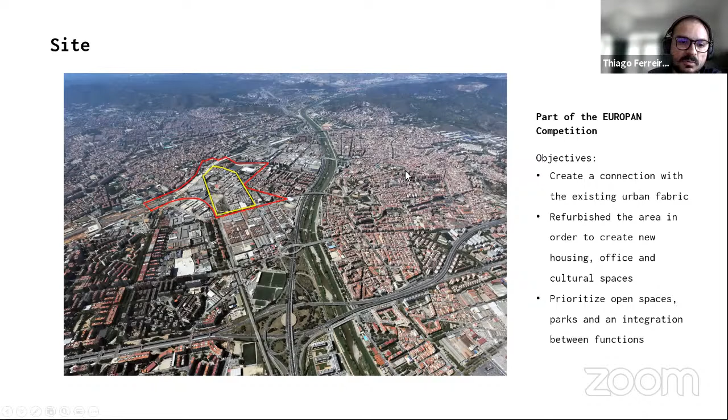The idea is that this area was part of an old competition called EUROPAN, as we are aware. The main objectives were to create a connection with the existing urban fabric. We know Barcelona is very rich when it comes to urban connections with this old urban tissue. Refurbish the area in order to create new housing, office, and cultural spaces, and give priority to open spaces, parks, and create this connection and integration between functions so the area becomes very lively.

So we ran just a few climate analyses, and as you can see here on the left, the wind rose indicates that the prevailing winds come from the north.

If we look at the radiation rose in the middle, we see that heat gains go up to 1,000 kilowatt-hours per square meter, and the majority comes from the south. Looking at the psychometric chart, we notice we have a lot of hours, usually over 100 hours, that we're out of the comfort zone. So we need to take interventions and measures to tackle that in our urban studies.

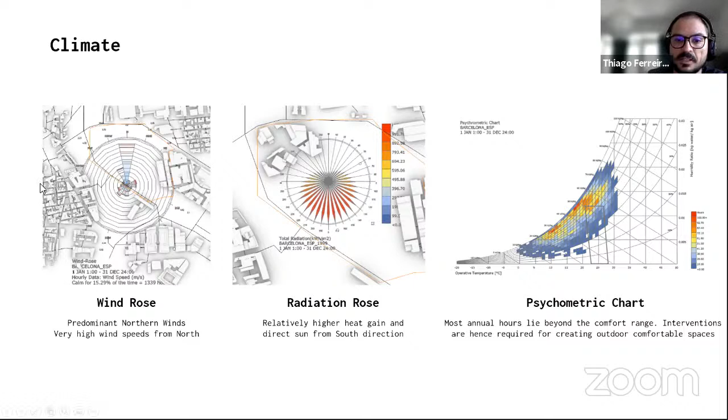Starting with the vision, the idea was to develop something very populated and safe, bring on the diversity of activities to make it a very attractive area, and also be able to activate daily life, and of course develop all this vision through a sustainable development approach.

In order to achieve that, we developed a couple of strategies: using mixed-use typologies, making the area very walkable, and to do so, we need to make sure it's also comfortable with a lot of greenery and shaded areas. We know Barcelona is pretty hot in the summer, and of course we're trying to tackle the problem of high energy consumption.

The KPIs we chose were solar radiation on ground, solar radiation on facades, wind speed and wind comfort. And when it comes to quality spaces, we chose compactness, occlusivity, and also PV potential.

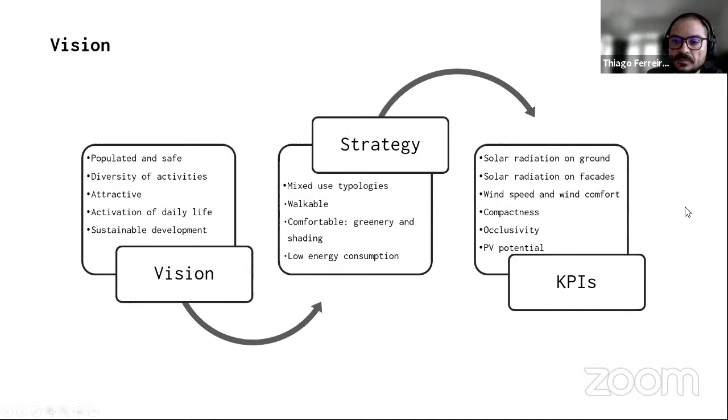So the whole idea for the area is that we could develop all these mixed-use typologies, mainly trying to connect the existing urban tissue. We know it's an industrial area, but some of the buildings around might have cultural value, so why not keep them and keep this spirit of the place.

What we see on the right is the idea inspired by the superblocks from the old urban fabric in Barcelona. There are buildings that take the perimeter but leave a courtyard in the middle to create this microclimate, but in a more optimized version, with plans that are less deep — 12 meters instead of 27, which is what we have in the old urban fabric of Barcelona. This gives more access to daylight and also creates a better microclimate.

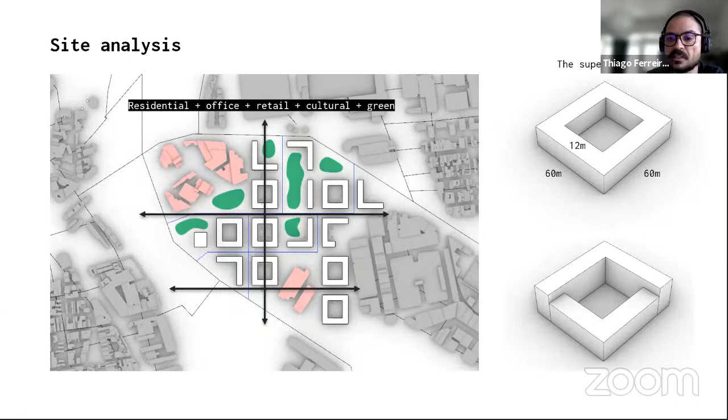And of course, we can see on the lower right that we can vary this typology as much as we want to create the uses that we want — they can be offices, housing, and cultural spaces as well.

We came up with 5 different proposals, and as Theodore said, the main aim was not actually to pick the best proposal, but rather compare these proposals and see how we can interact with the tools, what answers they can give us, so we can compare them and see the pros and cons of each one.

Basically, we varied these quarters or blocks around these 5 different proposals. Some of them have towers as the highlight spot of the area, and try to maximize the green spaces and green areas as much as possible.

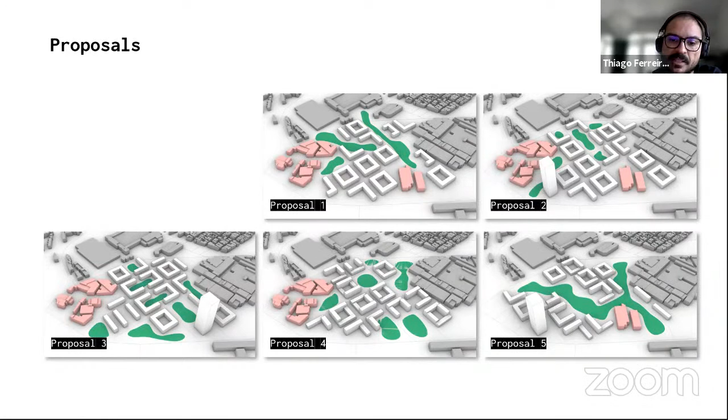As for the visibility analysis, we chose 2 metrics: compactness and occlusivity. It's interesting to see that the first 2 proposals here on top have a lower number, meaning they're more complex — which I think relates to the feeling of surprise we have when we visit old European cities. That might be something interesting to recreate.

This metric tells us how diverse or complex this environment or new place is that we're creating. When it comes to occlusivity, we see that the last two proposals, proposal 4 and proposal 5, have more open spaces — therefore the occlusivity is pretty low. So the whole space, the visibility, is a little bit enlarged from the main interest points we came up with in these urban planning proposals.

I'll hand over to Saket. He's going to talk about the environmental analysis.

Thanks, Thiago. I'll continue from here on the different analyses we did. As Thiago mentioned, we were not trying to come up with the best solution, but more to test out different tools from different plugins and integrate them with InFraReD, see what's possible, and play around with different things to improve the workflows we typically have.

So let's say we are using InFraReD to do the solar insolation analysis, and a few common things we can observe is that some massings create more insolation in the courtyard areas or in between the massings. These could be good spaces to put up parks, or the inference could be that if these spaces have to be utilized for outdoor sitting or conducting long-hour activities, then they need to be well shaded. The speed of the simulation allows us to test out multiple options.

That was one great thing. Since we had only 2 days, we just narrowed down to 5 options, but tried various types of analysis. Something more interesting, maybe we could look at the performance of the options in terms of KPIs - let's say how much percentage area is below a certain threshold, and we could filter out the performance of those options based on those numbers as well.

If we had more time, we would have wanted to split up the analysis between summer and winter, or maybe the 4 seasons, because in summer we want to reduce the insolation, and in winter we want to maximize it. That would be perhaps the next level of breaking up this analysis.

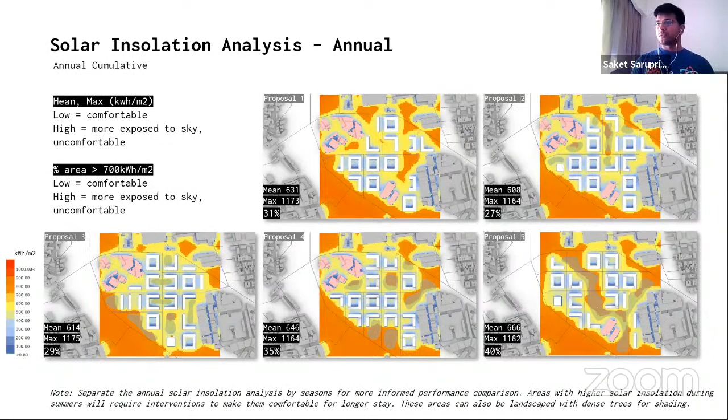If courtyard spaces are more crucial for us for the development, and they necessarily have to have high wind comfort and low risk of uncomfortable winds, then we could perhaps focus on just those areas and develop KPIs for those areas. We could choose, let's say, just the parks if they are important, and make sure the parks have less uncomfortable wind speeds throughout the year.

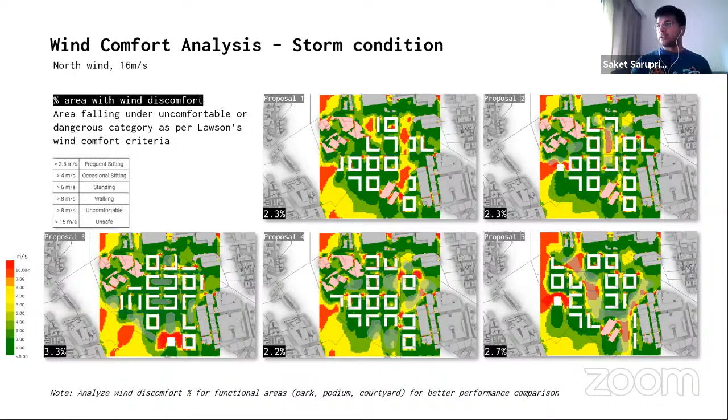Similarly, the solar insolation on facade - we wanted to bring in the energy factor as well in the project or in the analysis. So we coupled it with Ladybug tools. We just did a very coarse grid analysis on the facades, and that is in some way representative of what's the heat gain from the facades inside the massing.

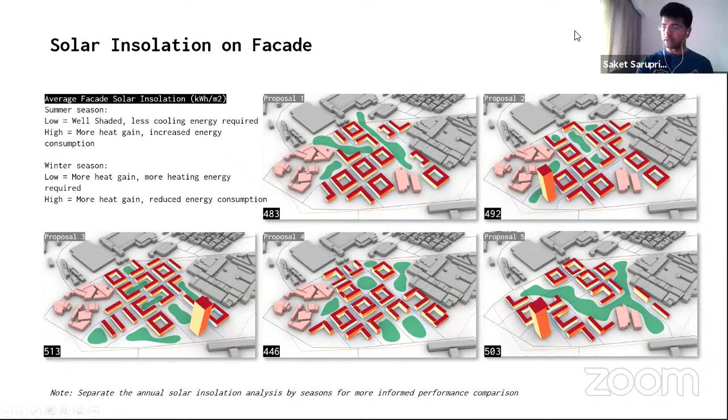So for all the options, we could find out what's the average heat gain per meter square, and that could be one of the KPIs as well. And of course, if we had more time, we would have wanted to split it into different seasons. In summer, we want to minimize radiation, and in winter, we want to maximize the radiation, and that directly relates to your energy consumption as well for heating and cooling.

Similarly, since we are doing radiation, we could also analyze, let's say, the PV potential of this development. So if we use 80% of the roof area for photovoltaics, what would be the overall PV yield annually? The numbers here are in megawatt hours. I think we're not going too much into the numbers, but just trying to explore what's possible if we increase the speed of simulations.

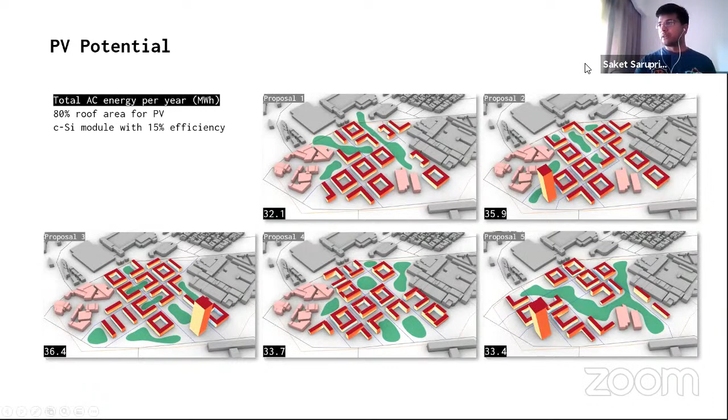So we had 5 design options. We did a few different analyses in 2 days' time, perhaps much less, because each one of us was spending just a few hours out of our daily schedules trying to bring scripts together and then put everything together in just one single package.

The key question we were always thinking in this workshop is: what if our simulation times were reduced by a factor of 10 or 100 or 1,000, in case of CFD simulations? So what if we had more time?

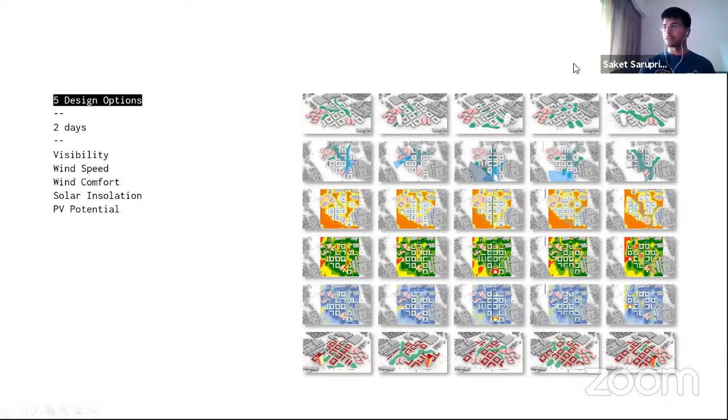I'm a building performance simulation guy, so for me, if I could get CFD results in 10 seconds, I would probably redo the whole approach to outdoor thermal comfort analysis. The CFD part is the most time-consuming part, but because InFraReD allows us to do one wind direction in 10 seconds, we could do 16 wind directions, and suddenly we have a base result for all of them.

Then we could extrapolate based on the hourly wind direction and incoming wind velocities for the whole year, and get the hourly wind values for every single analysis point. Similarly, the mean radiant temperature could come from EnergyPlus or IES simulations, or we could just use the incident solar radiation for a simplified study.

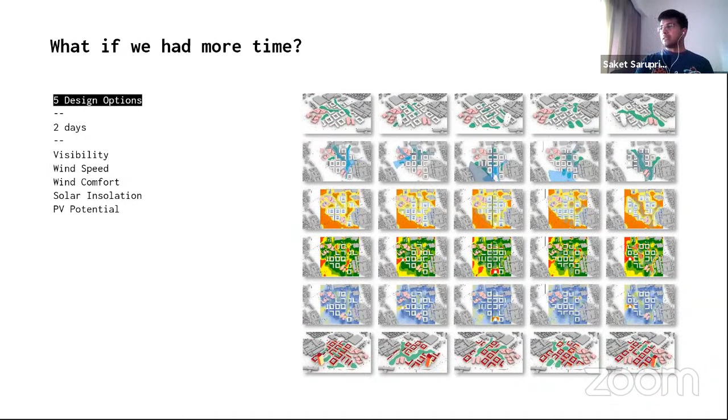The other factors would be determined as we know: the activity determines the MET value and the clo value, and then the hourly dry bulb and relative humidity. We could literally come up with an hourly thermal comfort analysis for every single analysis point, which I don't think is typically possible in our daily workflows.

This opens up a great new opportunity to further deepen our analysis, and also look at things, not necessarily in a more granular way, but to give more well-informed decisions on the usability of different spaces at different times of the year and different times of the day.

I also want to touch upon the point of quality diversity, as Theodoros mentioned earlier in the workshop. It's not a matter of finding the best performing option, but exploring the range of options, where some options might perform well at one thing and others at another.

If our simulation times reduce, we could also have multiple KPIs—outdoor thermal comfort, acoustics, connectivity, footfall. There's just loads of things we can do with the tools at our disposal. If we had more time, everyone could come up with new ideas for integrating various analyses, seeing the diversity of options and their performance, and choosing what works best for a particular situation. That's a quick one.

We can revisit any slide if you want. I just went through all of them quickly.

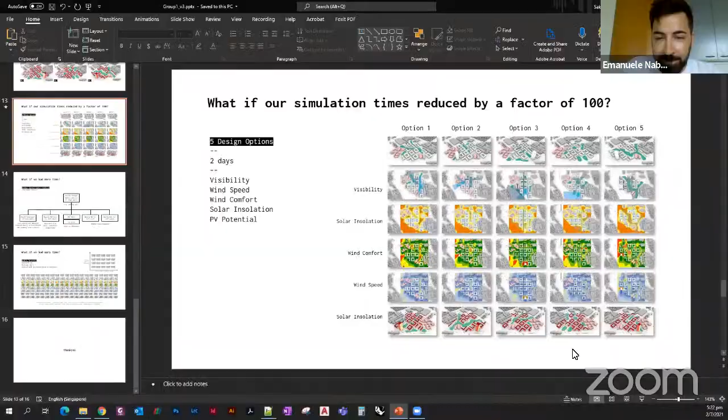Thank you for the supporting image. In a way, today Ladybug's calculation tools do not yet allow us to understand, for instance, how a certain shape or type of vegetation will affect the climate, as well as how this will interact with energy consumption of buildings and so on. So perhaps I wonder if the InFraReD tooling is also looking to integrate more variables related to green infrastructure. That's my comment.

So now again, I will congratulate you, and of course half of the congratulation goes to all the work that Theodoros and the InFraReD team and everybody else has been doing in supporting you guys. When you see students with prior knowledge in the field managing to get acquainted with a new tool and produce so many results early on, in 2 days, that's always quite impressive. Having played a little bit with InFraReD myself, I have to say that's quite an exciting tool.

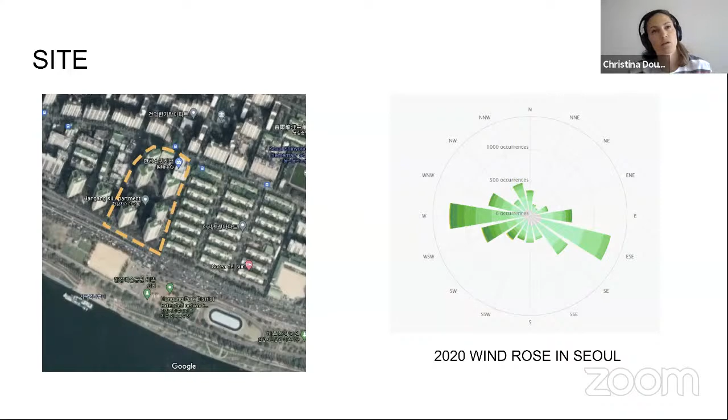So we see that these buildings are close to 80 meters high. Our design goal is to create comfortable in-between spaces between those buildings, towers. The strategy is to provide microclimatic comfort, keeping a similar volume of the home massing, and reduce the percentage of uncomfortable zones. The indicators were comfort, speed of wind, sunlight hours, and visibility.

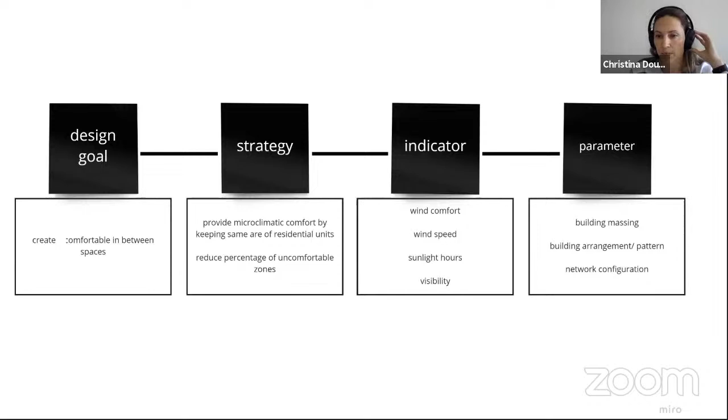We also implemented isovists, as we thought it could be interesting in terms of the space quality being created, though we won't show it. And the different parameters that we changed, we're going to see now.

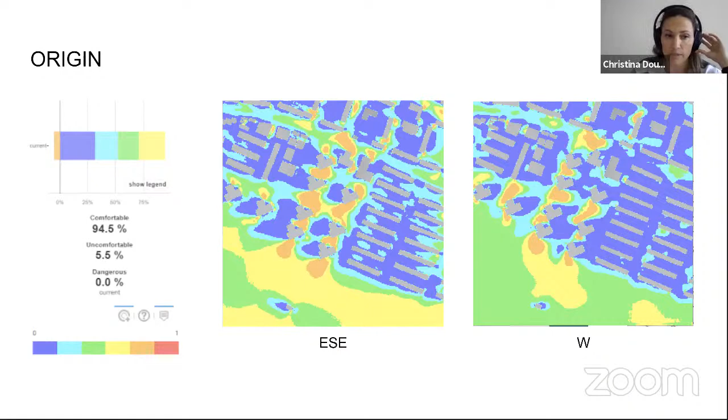Here I will just iterate. Here we see the original formation of the buildings and how the wind behaves from two different directions, and what InFraReD gives as percentages of uncomfortable and comfortable rate. Then the first strategy is changing a little bit, rotating the buildings in order to be streamlined with the wind, and we see that there is a reduction in the uncomfortable rate.

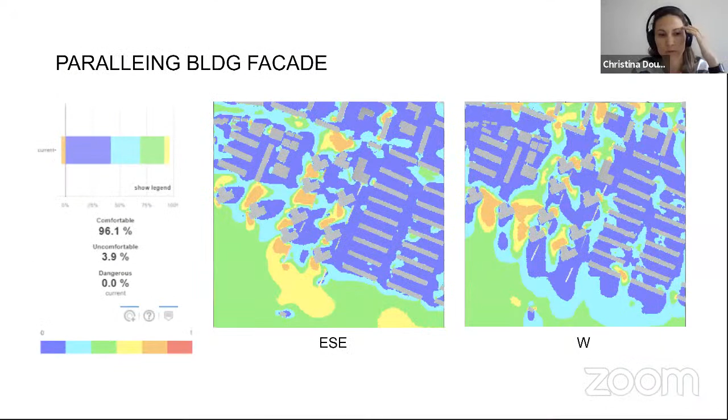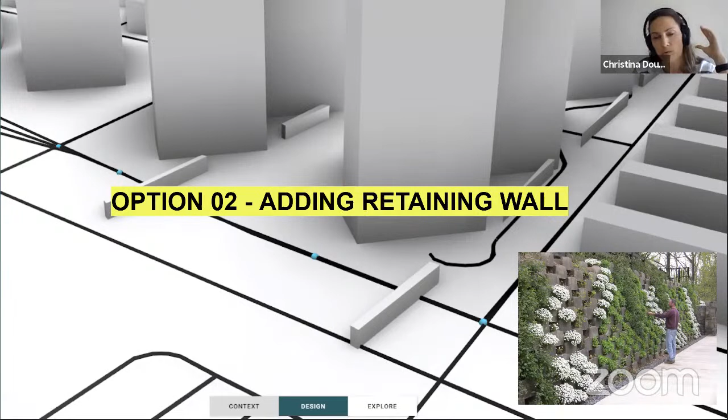Then another strategy was creating a retaining wall, so that again we kind of shape the wind. The retaining wall is quite high, it's 5 meters, relatively high according to what is there. And then again we see the results from that.

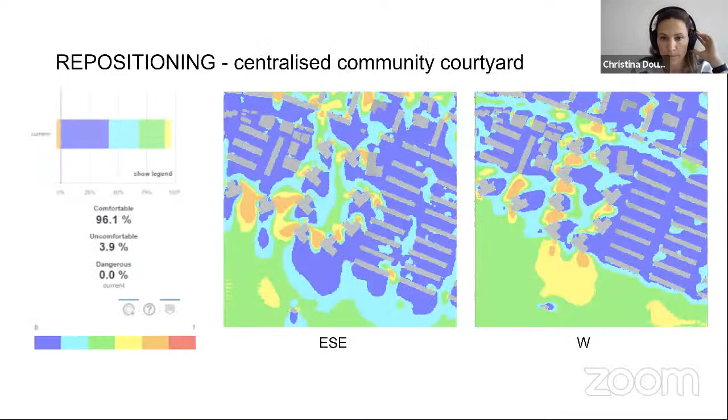Repositioning was about making the towers create a kind of courtyard and centralizing a bit the in-between space. Then changing the height, where there was not a lot of change.

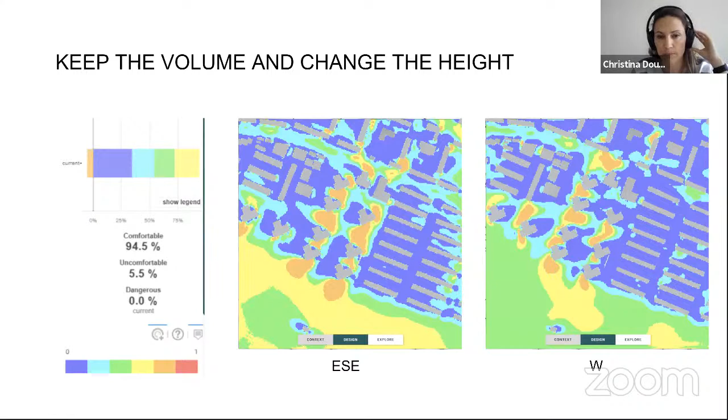Another one was thinking more about how you get the in-between space, so mainly designing the in-between. It was very simple again: creating a grid and thinking about how the quarters are being positioned in the site, whether they are centralized, decentralized, or create a buffered zone.

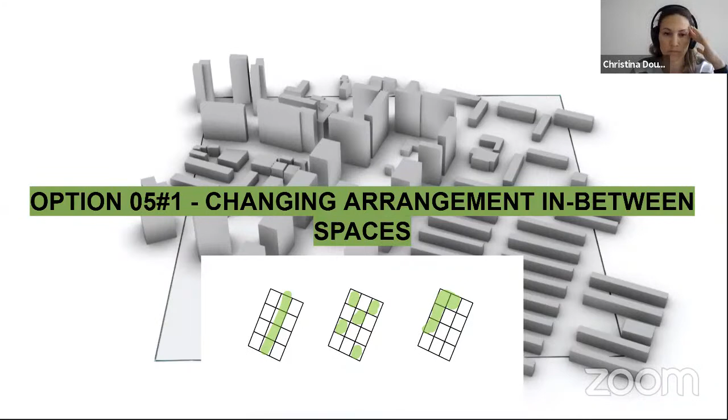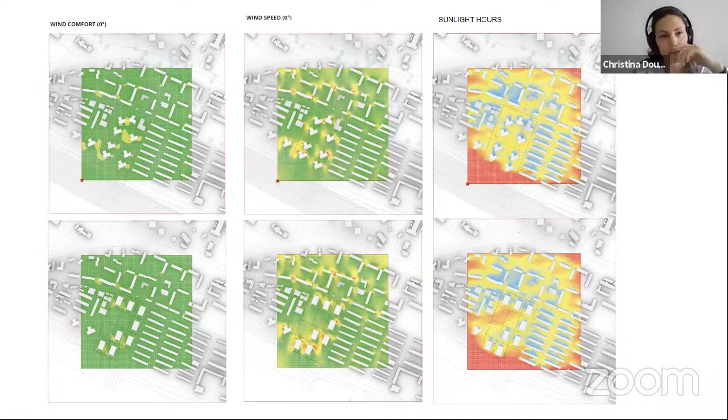I just want to say that since I personally couldn't use the InFraReD because it was heavy, my computer couldn't move. I did that in Grasshopper instead, and there we see also where the problem is in terms of time — it's much more time consuming.

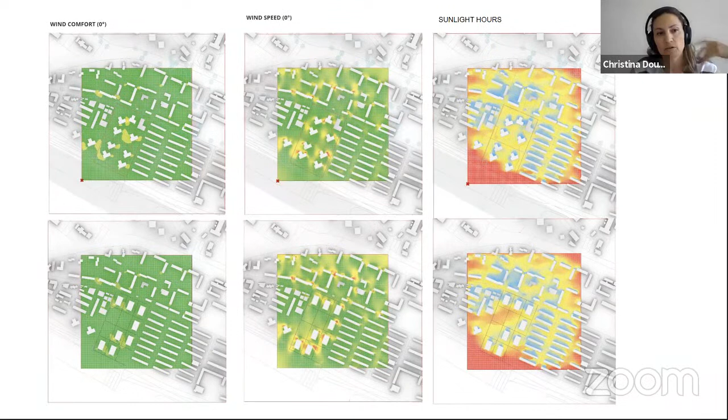And of course, you need to always create the indices — the indicators do not come automatically. So here I just want to show that on the top we have what is already there, and then with the grid, it's like a buffer zone and the different microclimates that are being created, always checking mostly the open space.

Again, like buffer and decentralized, and always keeping the same volume of the buildings. So these buildings are not anymore 80 meters high, but they're 55.

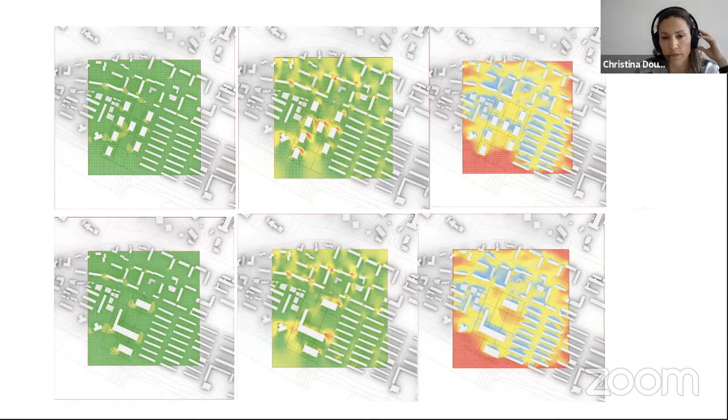And here, Jay helped me — she could actually make the InFraReD run. So we see these two last iterations in InFraReD, and the indicators of the percentages of the uncomfortable rate, and in this scheme where we see the big change among different wind directions.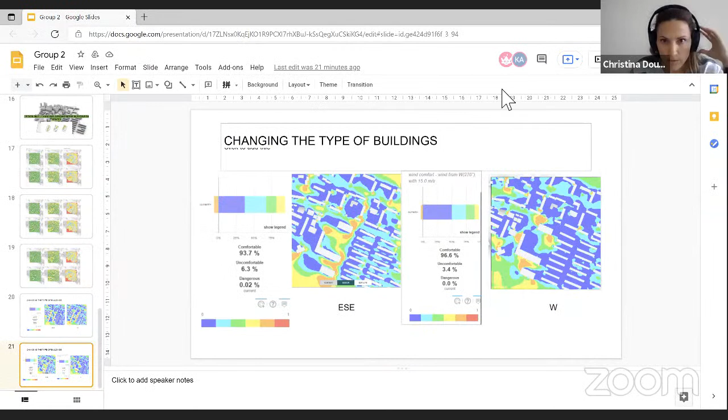And that's it. Thank you very much, Christina. And for group 2, do you have any comments from the panelists?

And this is just the Miro board where you can also see the isovist, and I thought it is quite interesting — it is not wind speed, unlike ours, but how close they are.

Yeah, thank you, congratulations. It's very interesting — I quite enjoy all those little experiments that you've been doing, trying to understand all those what-if scenarios. Can you explain a bit more? You were saying part of the analysis was actually done using some other pipeline.

Yeah, so the other pipeline, mentioned a little bit at the beginning by Angelos, is the integration to Grasshopper. So essentially you were meshing and sending through one of the different plugins to OpenFOAM, and then getting the results back.

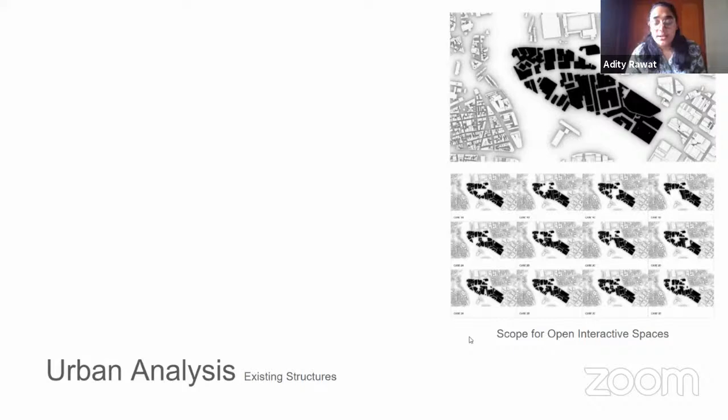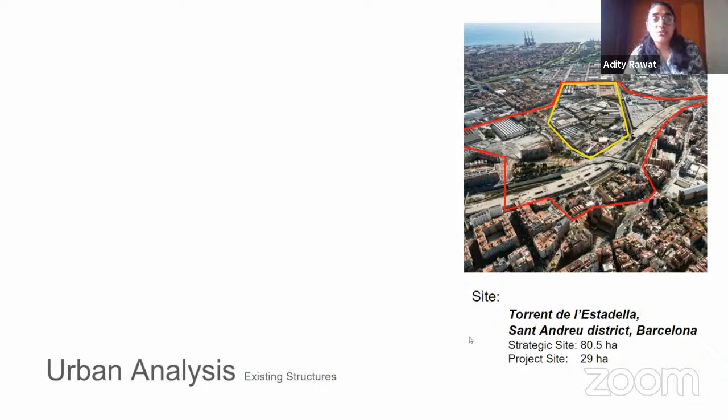So our site was also taken from the competition, and the project site was actually around 29 hectares, but the impact and study was more about the context, which included some new residential buildings as well. So our vision kicked off with the idea of the super block that exists in Barcelona.

So what they're doing is restricting vehicular movement in a few parts around the blocks, and that's actually taken as a site for tactical urbanism, where people are coming up with very interactive spaces that pedestrians use, and people are reclaiming the streets - that's the idea that's there.

So we tried to take a step further from that and use performative urban design to create these open, green, interactive spaces. The idea was to identify the potential impact of the existing buildings around it, and use indicators and analysis like wind speed analysis from InFraReD, but also sunlight hour analysis, because the city is tropical and we really need shaded spaces there.

But also talk about the functionality of that open space - so we don't necessarily need a blank ground, but also need interaction with the existing buildings, and a view rose analysis to understand what kind of engagement people might have when standing in an open space. So another vision was to maintain the place quality of the area.

What happens a lot of times is that in a new urban project, if we take away everything from the site and introduce something entirely new, a lot of the times it ends up being alienated by the people around. So we wanted to avoid that, and explore some possibilities using controls like different configurations of open spaces that we know of to come up with 12 different iterations.

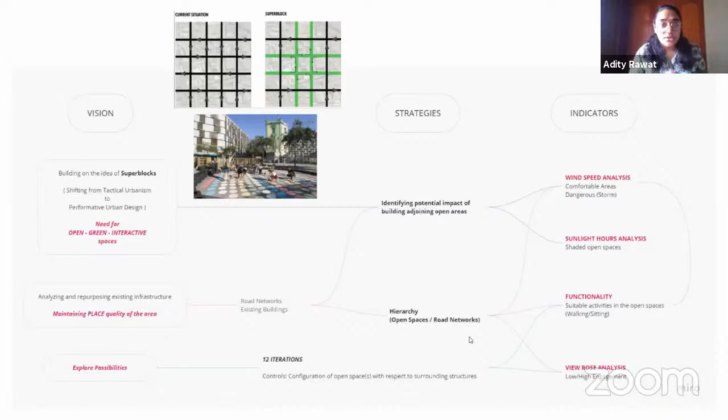This was the existing wind speed analysis of this site. We focused on the storm scenario and low wind scenario to get an overall idea about the site.

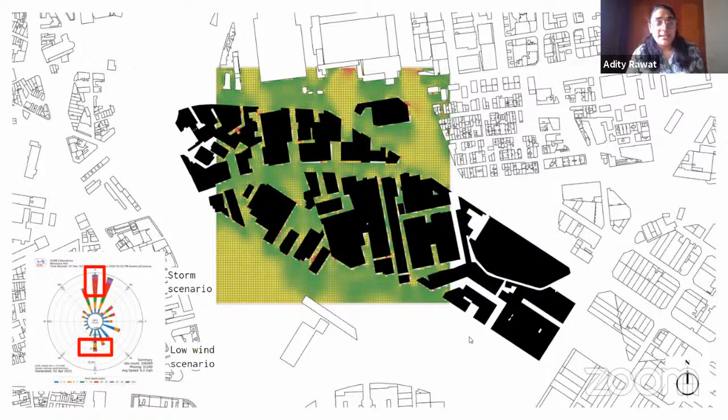The structure of our iterations was to define three types of open spaces. One is a primary, bigger open space that can be central to the entire site. The second typology included secondary spaces that are connected with existing road networks, but can still stay within their areas. And then decentralized, even smaller spaces all over the site.

So these were the different 12 iterations that we decided to test using InFraReD and other simulations. This is the wind speed analysis that we used to generate different KPIs and also to understand the kind of trends these wind speed analyses were telling us about.

These are areas where the structures are actually converging at some point, so that creates some kind of an increase in speed. Understanding that kind of trend was important to identify which works better for that kind of space.

An example like this would tell us that we can have two different spaces with different configurations of wind comfort there. We also took into consideration the existing infrastructure and road network, for example.

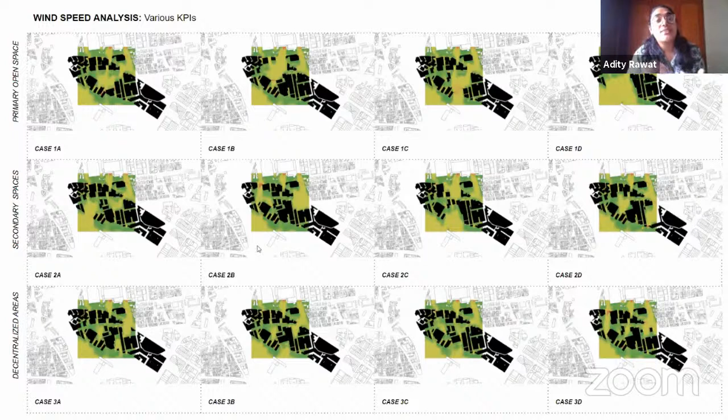Moving on to what kind of output we were able to get within Grasshopper. There's a much better way to explain all of this, but to focus on what we could extract from the output, the idea is to first compare along the same type of open spaces and identify which works best.

For example, in the first row, you can see the last one is the least dangerous when it comes to storm scenarios, but can provide spaces that are best for walking fast, for example. So we can talk about creating jogging parks and stuff like that.

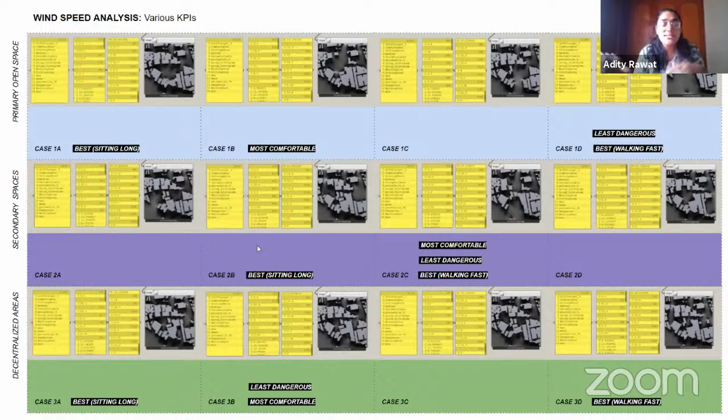In the second row, we see case 2C was most comfortable, least dangerous, and was also good for creating specific kinds of spaces. The third row shows us that the second case was most comfortable in all of them. So the idea is to compare them first within the group and then use other analysis to compare them with each other in a column.

So this is the idea of using visibility angle as input. One of our ideas was that we can repurpose these existing buildings into mixed-use buildings, so lower floors can be commercial areas and the upper floors can be office spaces or even residential spaces.

If we have a lower visibility angle... a higher visibility angle, we would have higher engagement. So this is the kind of chart we could come up with, showing what spaces are able to interact best with the surrounding buildings, so that the business aspect of the area is also maintained and there's a lot of interaction between the people as well as the business owners there.

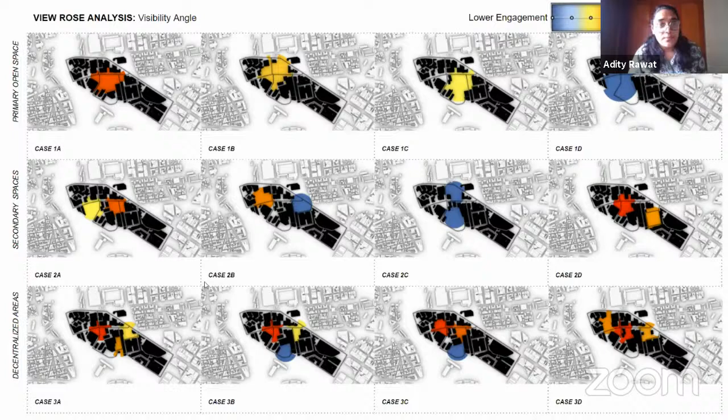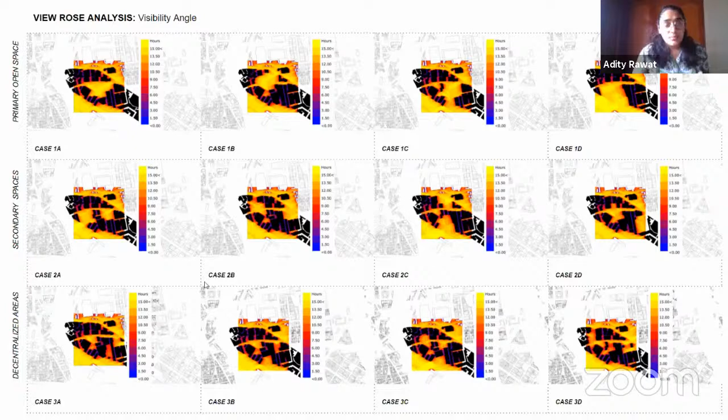This is an expected scenario of sunlight hours analysis. Smaller spaces have lower sunlight hours, which would work best in a place like Barcelona. So this was the best option we could summarize with.

Here you can see there are three major open spaces with different space quality as well. For example, this open area is actually railway tracks, and the view from here is very different from what you would experience here, which is near traffic, a very busy road.

This space has kind of some enclosure to it and a different kind of wind comfort when we go here. Compared to that, when we talk about engagement, there are three different types of spaces we can talk about here.

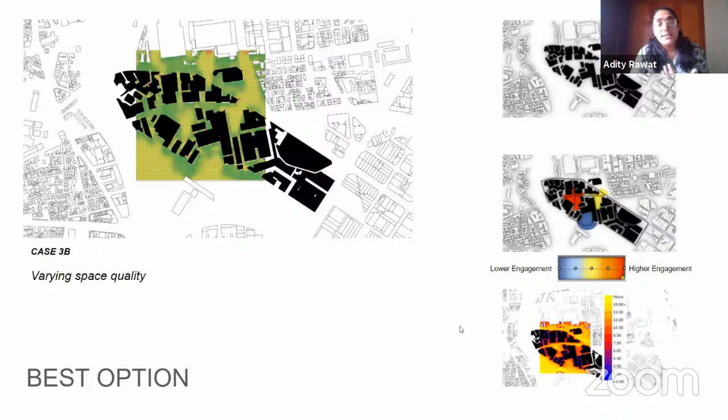So there are three: we have lower engagement, where people can spend their time for leisure activities, and higher engagement areas where businesses can thrive better. And then solar analysis tells us that these are better during the summer as well.

Further exploration that we were all discussing amongst ourselves was that we could start with cataloging the existing structures, to identify which can be saved and which cannot be saved.

So that can be a part of where we can start. One of the ideas was to maintain the total floor space throughout the site, so structures that are much more stable can be expanded or built further. Then we can see a change in our skyline and change in sunlight hours in those open areas as well.

And of course footfall analysis, we did not have time to analyze that deeply across all the iterations, but it's something we can definitely work on in the future. One idea was taking the best option and going back through a Rhino CFD workflow to check how accurate our output was. So my overall experience is based on work I had done a while back.

But this took me months to actually get to a much more complex analysis, and even then I was only able to get values of all the grids in my area. So this was very tedious for me. I'm very impressed with what InFraReD was able to accomplish with this process.

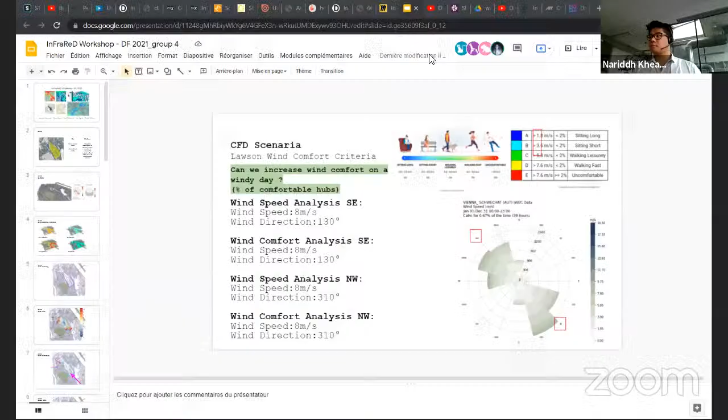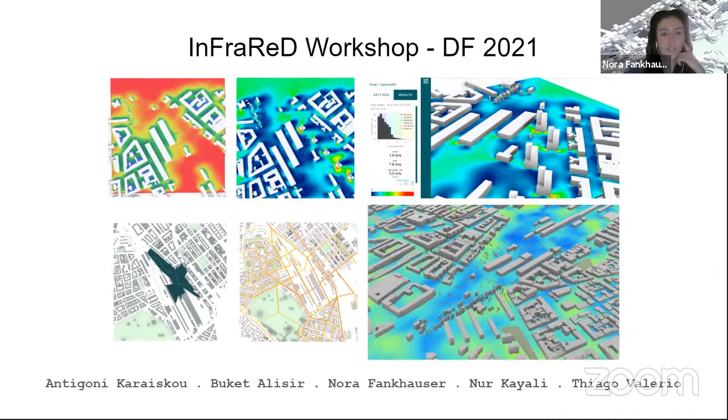Okay, cool. So hi everyone, this is group 4. We didn't focus much on the design - it was more important for us to explore the tool and the analytical part of what is actually possible and the scope of it. So we chose the site of the Nordwestbahnhof in Vienna, an abandoned train station. Our objective was an early stage proposal to come up with an analysis which leads to different typologies and how they perform in space, also considering network optimization and, with the building typologies, the embodied carbon emission, which we'll show you later.

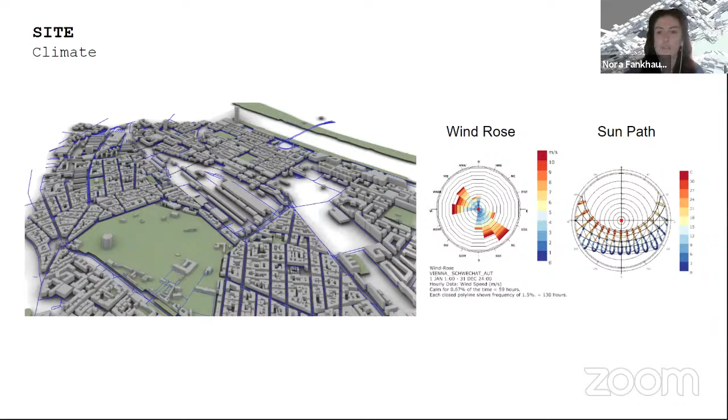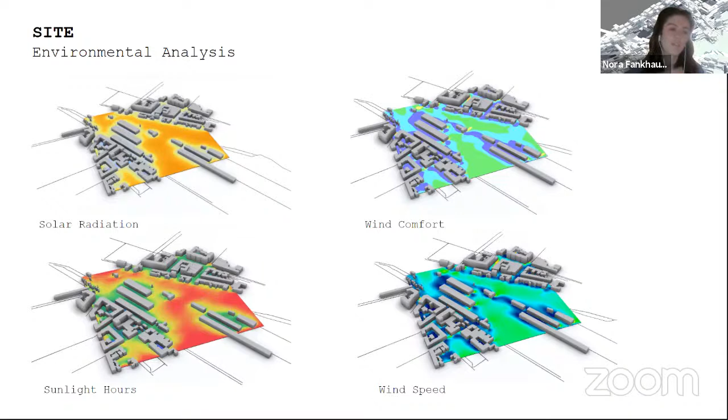A first attempt to just get to know the site a bit and the climatic conditions, mainly the wind rose - the wind coming from southeast and northwest - and then the sun path. A first baseline from InFraReD, basically showing all those different metrics. This gives us a first idea of where we can put our typologies, how they perform, and later on how they iterate.

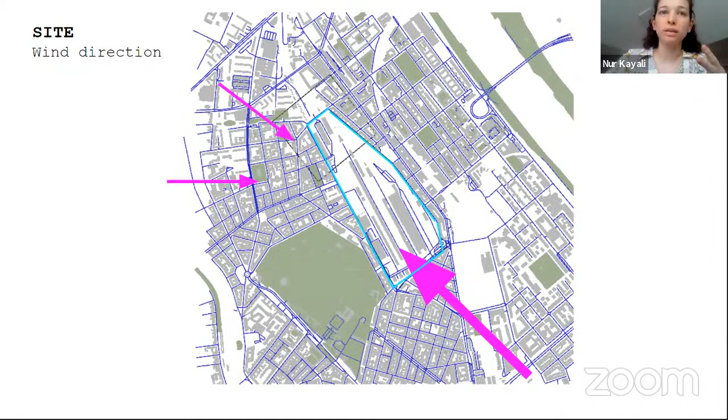Okay, so our site was an old train station. We wanted to choose this site because it's close to the river, and also it has green areas, and you can see here the voids. So we wanted to see the effects of the wind coming from the southeast, the strong wind, because here, as you can see, there is nothing, so the strong wind effect will be felt more in these zones than in other zones. This is the green areas also, and these are the voids.

We can go to the other slide. So at the end we decided to focus on zones rather than the whole site, because we just had 2 days. So we wanted to start focusing on zone 1, because it's surrounded by residential area and also with voids and green areas, and we can see the effects of the southeast strong wind. That's why we started to analyze zone 1 and proposed a design for this area.

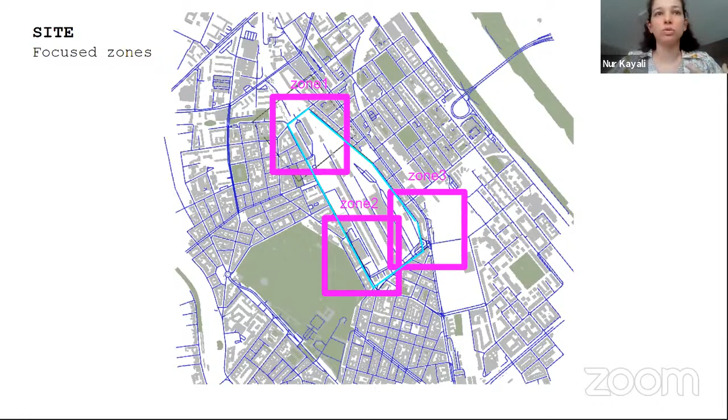Yeah, this is the close-up. Yeah, you can take over. Here you go.

So here we just did some quick analysis, because even inside the zone, the 500 by 500, we thought that was really big - there's a lot of area for us to use. So here we did some quick terrain analysis and ran some water simulations to see what are the areas with high probability for water to accumulate.

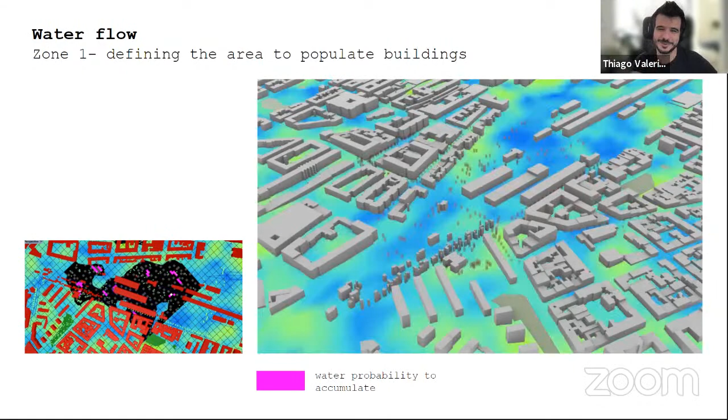And we selected those regions as green areas. The objective of this workflow was to see the relationship of those green areas to the other green areas that already exist, and probably also try to measure that using the network tool that already exists, in terms of distance and centralities. But we encountered some problems making the network analysis work. Still, the idea was, at this early stage, to understand the network and the environment in order to then start creating the areas for the typologies.

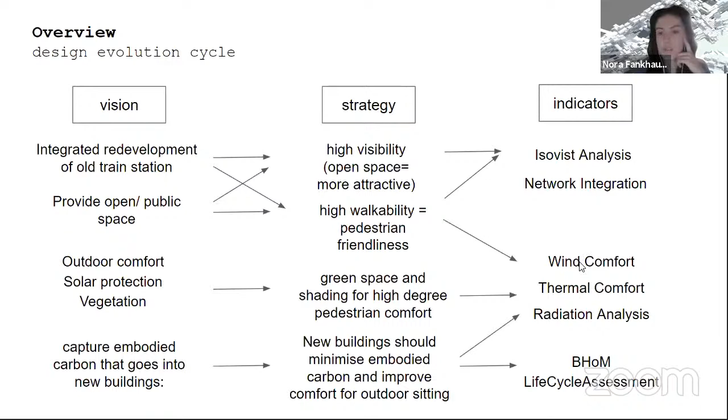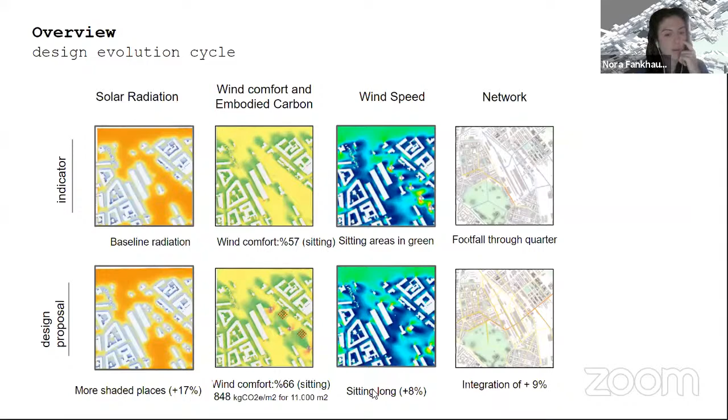Yeah, so a quick site vision, a summary with overlaid analysis. Our goal is to have a higher street density, higher accessibility especially to zone 1, and integrate more shaded space, more green space, and according to the flooding analysis, the pond location. So, coming from the vision, going through the strategy - including high visibility analysis, walkability - and then building new typologies to minimize embodied carbon and improve outdoor comfort. These are the metrics we used, which I'll run through quickly: the indicator, and then the optimized version on the bottom with all the improvements.

A first baseline of the visibility analysis is with a radius of 900 meters to evaluate the site, kind of imitating a walk of one person going along the site.

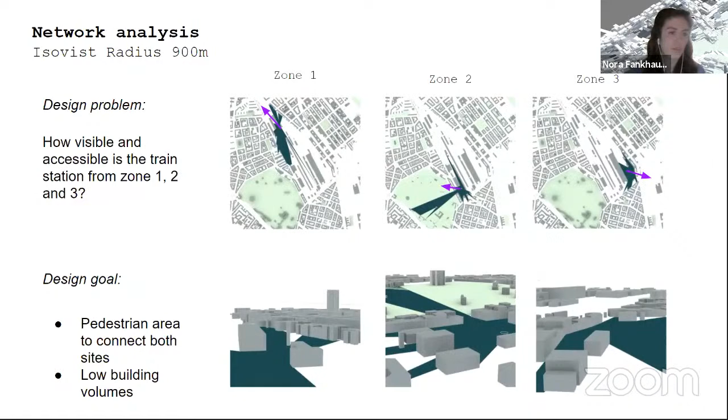For each zone, we focus now on zone 1 for the network integration, first on the left, the current closeness centrality, which means red is reachable within 10 minutes. In the target, what happens if we change the network and break out those patches on the site.

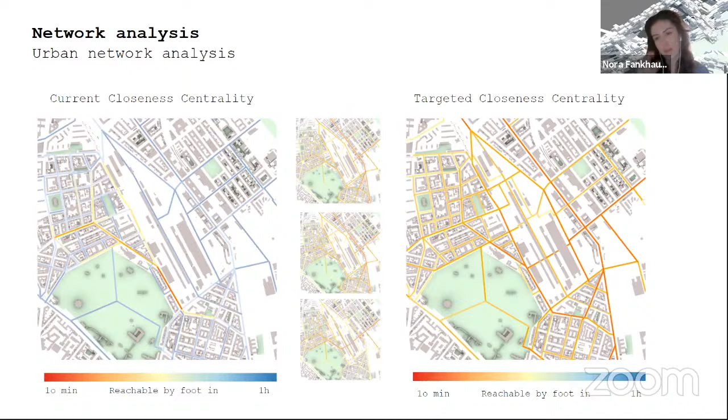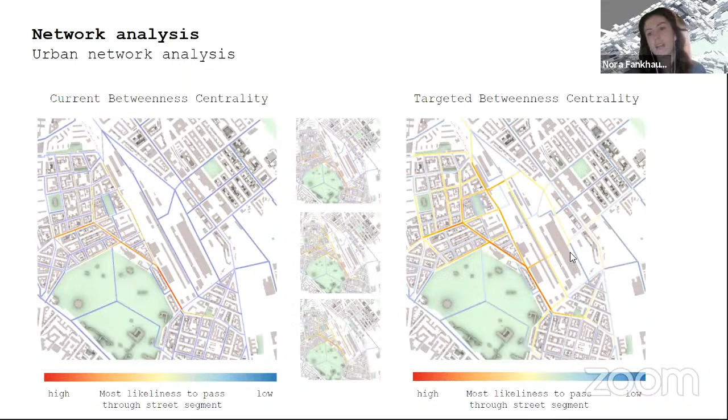Same with betweenness centrality, which means going from most likeliness to pass through the street segment. And then if we change the network on the right, it increases the likeliness that people walk through.

Following that, we wanted to look at what's happening on the inside of the new buildings that we're trying to propose here to improve the environment. So we used the BHoM plugin for that, constraining embodied carbon analysis in the production stage.

Emissions coming from manufacturing, A1 to A3, and then the ICE database. We only checked from the scope of the building columns and beams to keep it short. We considered concrete and rebar for this study to proceed.

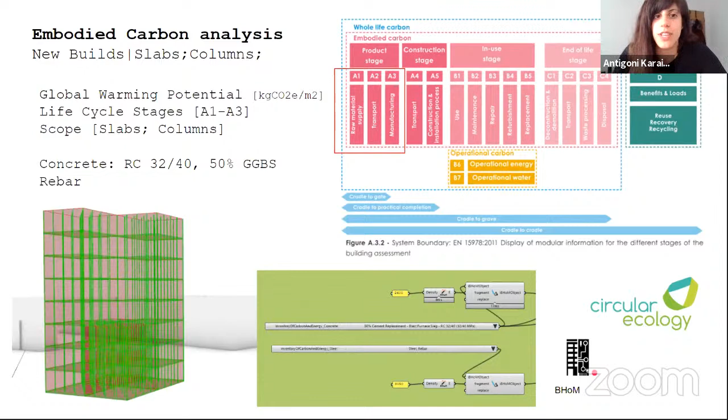For the CFD scenario, we thought of the two wind directions that are most prevalent, southeast and northwest, and then looked at how we can improve the percentage of comfort for people, wind comfort during a windy day - the percentage of comfortable hubs that people can sit in for a long or shorter time.

So we focused on these regions, and started with the baseline trying to evaluate this. We put the range up to 8 meters per second, as we said, so we are looking on the lower side, how can we increase this comfort?

On the next scenario, you can see the indicators of how we increase the percentage by putting some building volumes, while trying to keep the embodied carbon down, tracking the embodied carbon and the building gross floor area per square meter.

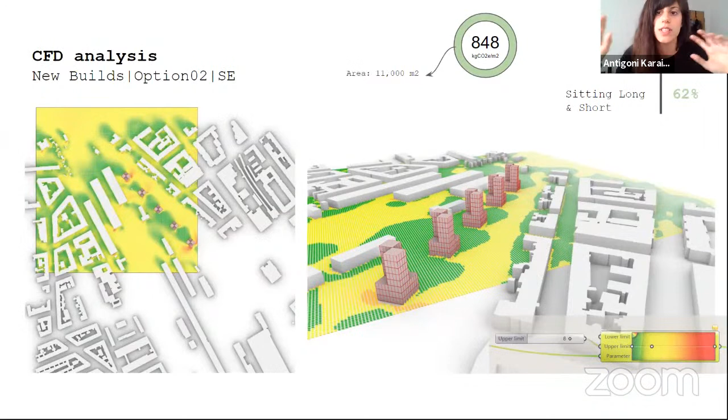So we try to move them, to see how we can increase a bit the comfort percentage of our site for people sitting comfortably, and then if we omit some buildings and put some trees instead, can we keep the same percentage of comfort?

Then the carbon here, I think it's a glitch, so it keeps the same carbon - I think something's wrong with my script. But the idea was to test different building typologies and vegetation and how this interacts with carbon and wind comfort.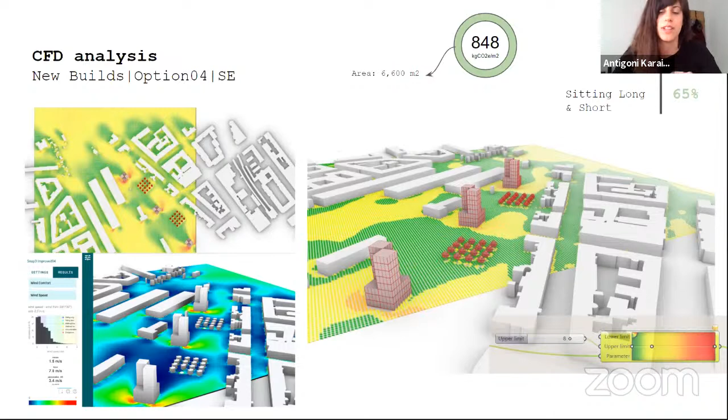So in the end, we tried to put everything together, like the visibility study, the solar studies, the wind comfort, the embodied carbon, trying to see where everything sits.

In the last slide, we said okay, let's start from the baseline, and then based on the conditions we have, select what fulfills - for example, omitting some buildings, putting vegetation in places where water accumulates as well.

So we can create some comfortable hubs, because this only takes into account wind comfort. If we talk about outdoor thermal comfort, more things come into play. And visibility is another thing connected to the buildings - where we put buildings, we obscure views. So this would come next, but feel free guys to jump in on final concluding remarks.

In general, I think the InFraReD context enabled a lot of integration and also a lot of iterations as far as I'm concerned. Usually when you do an analysis, you set up everything and hope to get the results you want, and after that, if you're to do an elaborate analysis again, you're cautious about the fee and the time you need to consume. So I think this enables you to get a glimpse.

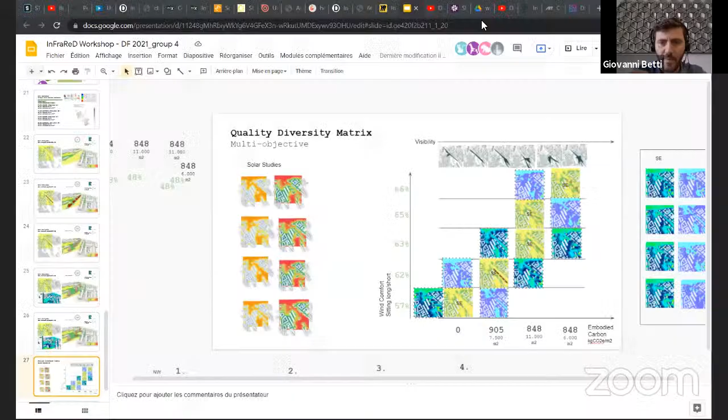So I thought it was really interesting. There was a slide showing a series of overlays with the site and the site vision, which I thought was really powerful, because in that one you were setting very specifically - you had a bunch of dots saying here we want more shade, here we want more green, here's where we should have grass, water ponds, here's where we should add more density.

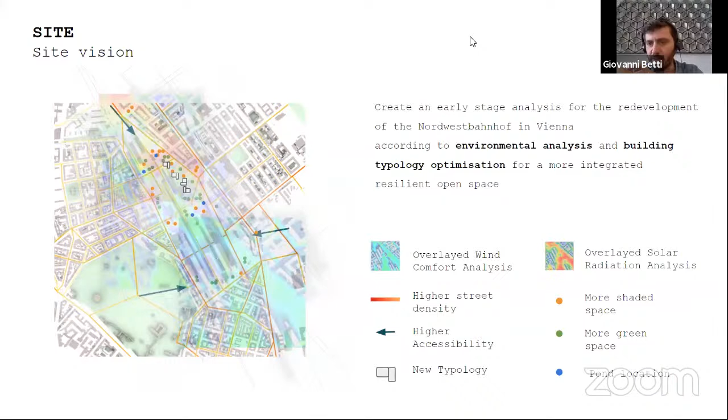So it's really like having this blueprint as to what you would like to achieve, this design hypothesis, and then you have all those analysis tools - InFraReD and everything else - that enable you to refine and verify how to achieve this design intent. So this one for me was what set your work slightly apart from the rest, because you started with a very clear design intent, and that makes all the subsequent exploration a lot more focused. And then a more focused conversation gets quite interesting, and we can see that even in the very limited amount of time. So I think it's very interesting.

I think it's interesting that we start thinking about embodied carbon. I understand, of course, different materials have different performance, so it makes sense to build with one material and compare options. Was there an intelligence saying that if I build more stories, the lower floors get bigger columns, so there's more carbon intensity, or do they need a better foundation? This was just out of curiosity. No, it was very simplified, just similar slabs and columns, no changes, only keeping track of the floor area.

But to me, this is the fascinating thing about the overall direction of analysis that things like InFraReD point towards, because ideally you don't need to be a structural engineer doing all the calculations of what diameter a column needs if it has to hold 20 floors above, but you also need the foundations.